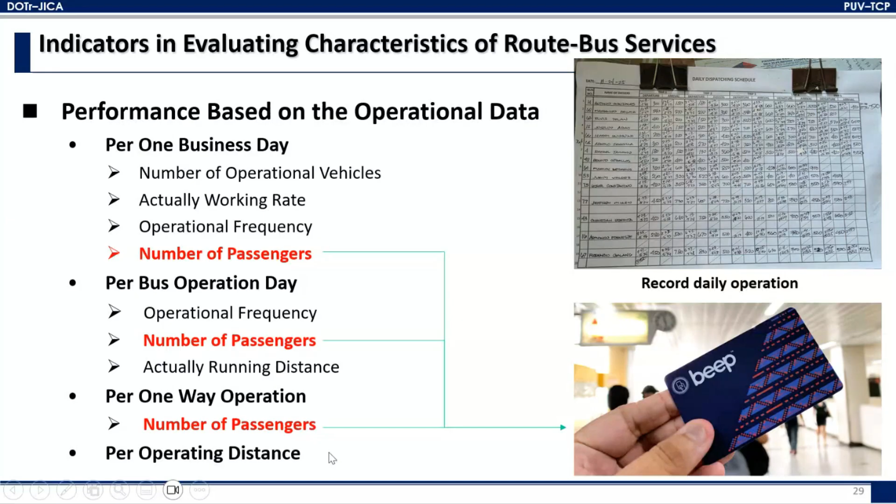That's why many cities are trying to introduce IC cards to collect such information and to shift from this commission-based industrial structure to more modernized bus transport operation. But anyway, currently such information is not available in this city, so how to collect it also needs to be considered. Another performance indicator is per operating distance, also a very important indicator for public transport planning. So let me explain these indicators.

First one is per operational day, for example, the number of operating buses, called fleet size. The operating buses means, for example, one company registered 20 buses, and how many buses operated on average in one day is a very critical indicator for the bus business investment scale of the bus route and companies. And this number of operating buses per number of registered buses, so in this case, 19 per 20 means 95% actual operating ratio. Actual bus operating ratio is the indicator of the effectiveness of the business.

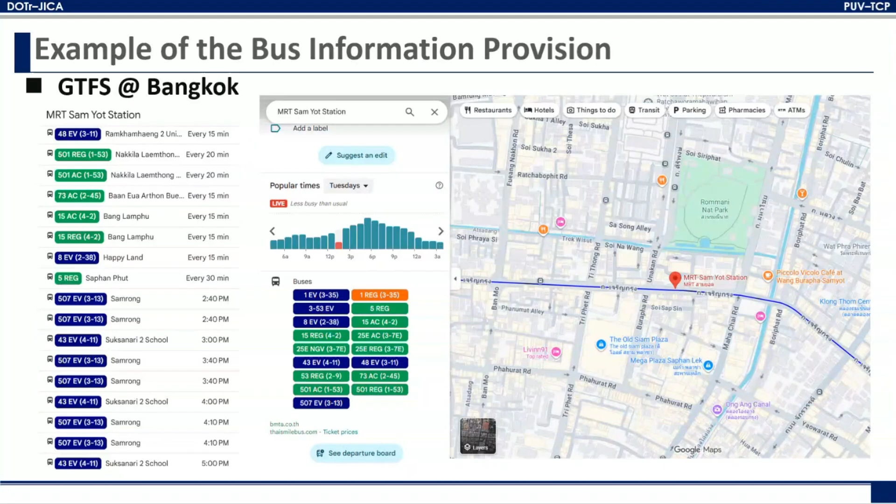And I suppose the actual operating ratio changes day by day in Metro Manila recently. This is also a very critical point. If this actual operating number is not fixed, then timetable operation is very difficult for the operator side. So as the first step to modernize public transport, fixing this actual operating ratio is one of the critical items.

Then the second one is the number of trips, the indicator of the operational service intervals. Sometimes it is very difficult to understand the operational frequency of the bus transport. This is also due to the instability of the number of operating buses and the number of trips by buses.

For example, some jeepney drivers say yesterday they made 3 trips, but today 4 trips. But the day after tomorrow, they have some schedule in the afternoon, so they make just 2 trips. This is not managed by the operator, meaning the owner side. So in that case, the number of trips is also not fixed per day.

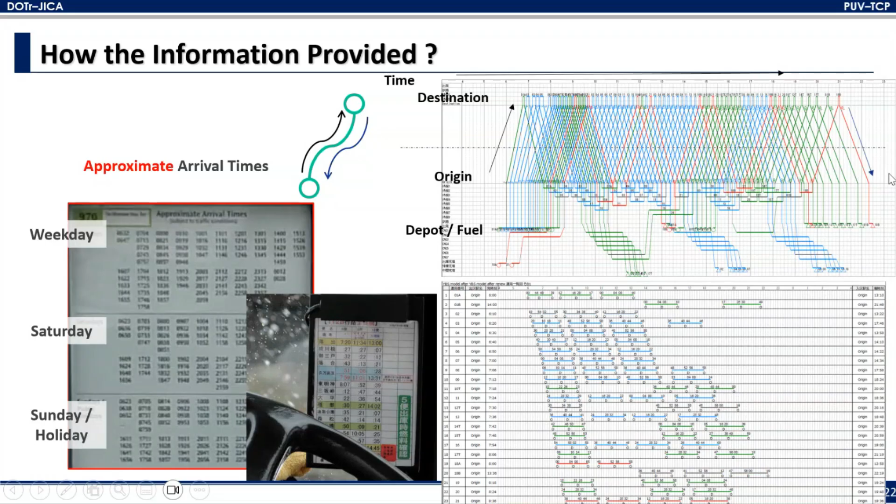Then based on this information, how the operational efficiency can be maximized will also be considered by the bus operators, and a fixed operational schedule can be established. So to correct the operational service interval, the number of trips information and number of operating buses information is very important. And the number of passengers per day will be the indicator of the profit scale of the bus route or bus company.

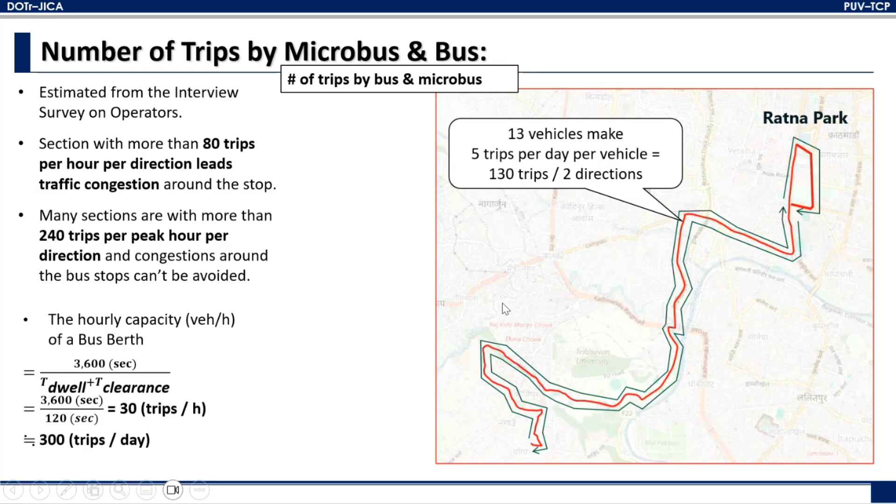For example, the number of trips by public transport is collected by each zone, and many bus routes' information is overlaid by sections. Such merged number of trips by road section can be visualized like this. Then according to the capacity of the bus stop and the road section itself, the number of trips by buses shall be controlled. I believe that the principal component of route planning is just controlling the number of trips per section.

And if the number of trips highly exceeds the capacity, sometimes this is operated by UV Express and jeepneys. Such corridors shall restrict the operations of smaller vehicles, promoting replacement with larger buses. In this context, the modernized PUJ is also not applicable to operate in such very busy sections because they can carry just 30 passengers. So larger buses should be actively implemented for the heavy sections. To make such verifications by section, I'm very eager to find the related information from your side.

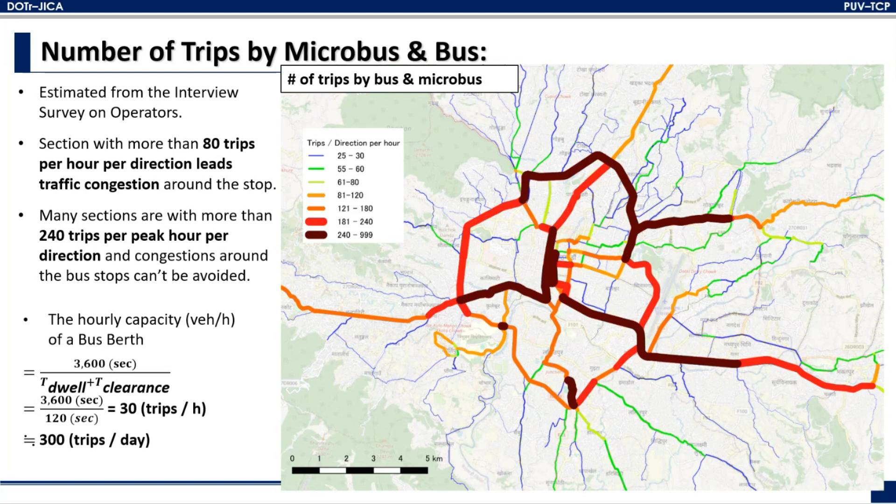And the trips per operating bus is estimated information from the existing values: how many trips the bus makes, 3 or 4, or 2 or 3. Such information will also be an indicator of the productivity of the public transport. And when you consider, for example, if the route length is fixed and we understand how many trips are made by each bus, then of course the operating distance can be estimated like this.

For example, in the Japanese bus operators' case, the average operating mileage per bus is 166 kilometers. And internationally speaking, operating longer than 200 kilometers per day causes traffic accidents due to driver fatigue. So for managing the working conditions of the drivers, such an indicator shall also be prepared, I suppose.

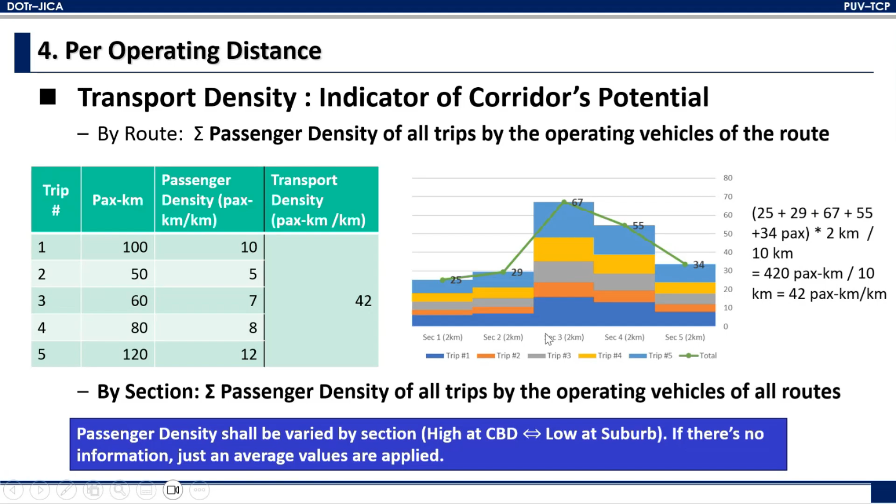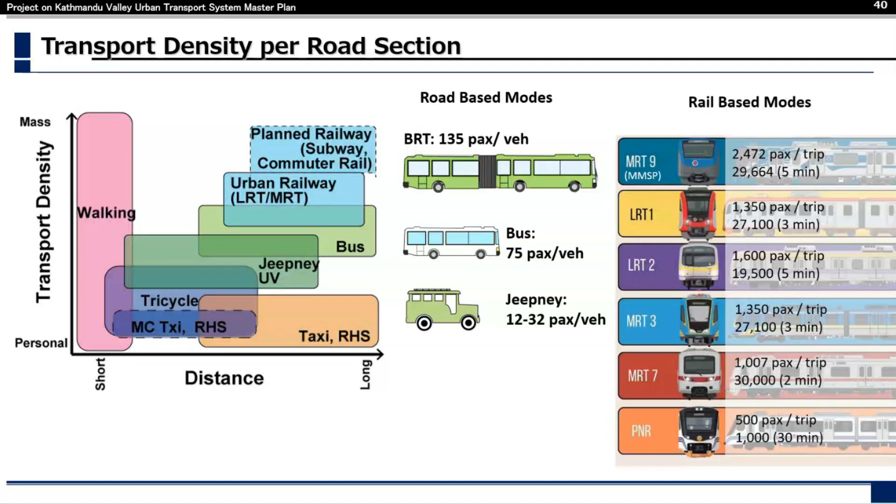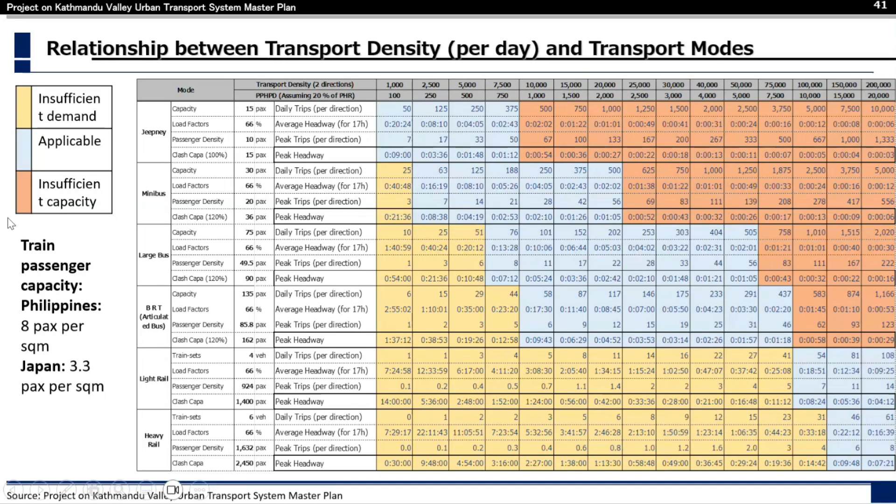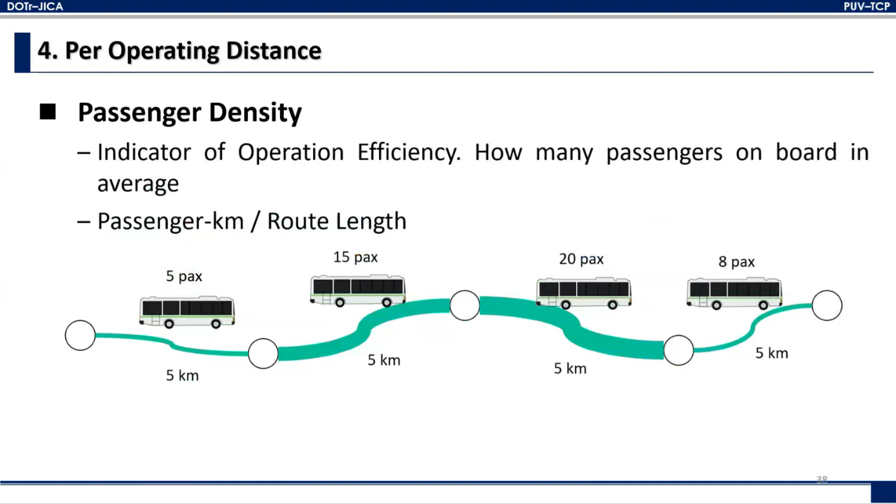Then, the passenger kilometers shown in these slides are also very important. This indicator is also used for the fare policy. One of the very typical methodologies for fare setting is the FDC, fully distributed cost method. The operating cost and the reasonable profit are estimated through financial information of each operator. Then these are balanced with this cost, and the passenger kilometer and the fare ratio will also be estimated.

I'm not sure how the fare policies for jeepneys and buses in Metro Manila are determined. However, when they make decisions on their fare policies, such a distributed cost methodology is necessary, I suppose. So to estimate the fare ratio, not only the FDC, fully distributed cost, but also the passenger kilometer is one of the very critical variables for fare policies.

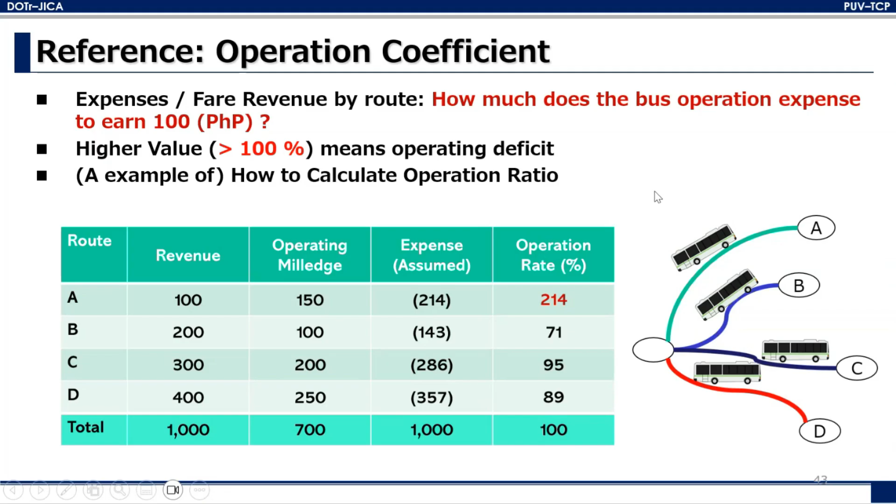According to some cross-subsidization schemes, I expected the operating profit of these corridors could make up for the other routes' deficit. However, I suppose it does not. So in total, the Nagoya city buses are financially not viable, largely supported by the government and municipalities. However, when you visualize such information, this route is financially viable, this route is not, but this route is necessary to support citizens' daily activity. So whether subsidization is necessary or not, such decision making is supported by these operating indicators.

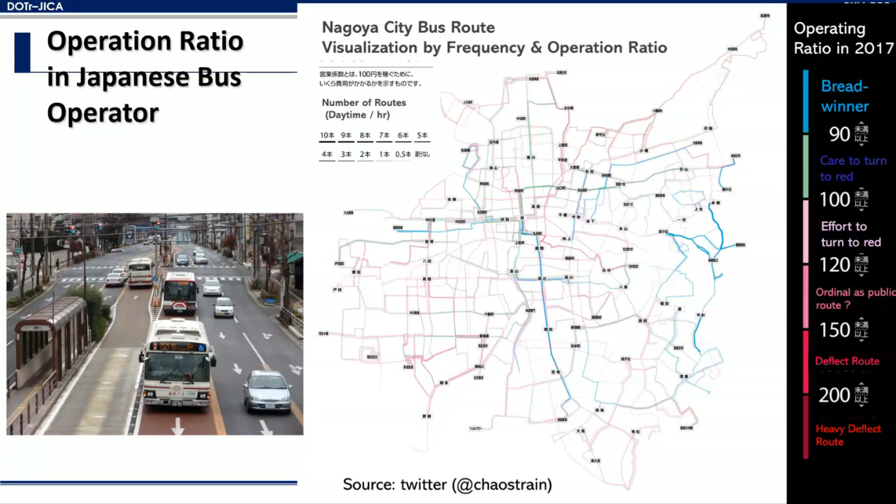But it is not so feasible to introduce in your city in the short term. So I would like you to understand that such indicators are also there for public transport route planning.